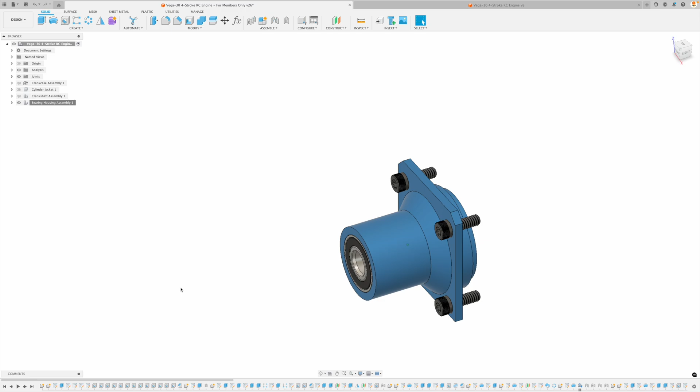Let's make the bearing housing assembly. So in this tutorial, we are going to tackle the bearing housing assembly. If I isolate this, you can see we have 4 screws, the bearing housing, and a front bearing and a rear bearing right there.

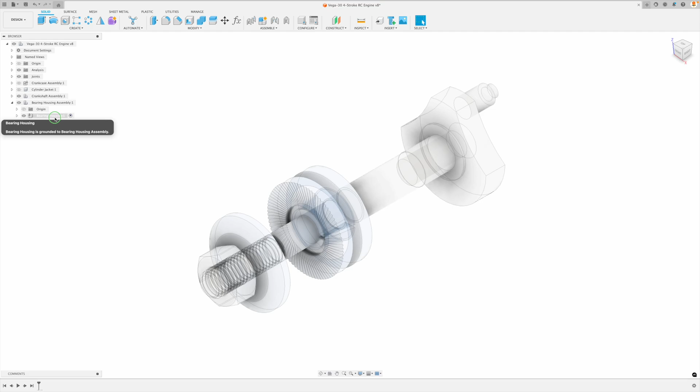So let's get started, and here's where we finished off with our last tutorial. Let's go right into it. We're going to start a new component, and of course this is going to become a sub-assembly, and we're going to call this our bearing housing assembly. Within our bearing housing assembly, I can just expand the browser there. We can create another new component, and this is going to be our bearing housing. Now from there, we can right click and we can isolate. And let's just get to sketching.

So the first thing we're going to do is create a sketch. Of course there's a number of different ways that we can do this, but this is just one approach. We are going to start off with the center rectangle, and I'm going to do the exact same thing here as our crankcase. So we're going to, first of all, constrain it vertically like this, and then we're just going to constrain it with dimensions as well. So the first one over here, 0.606. And to the top over here, we're going to go to 0.76 right there.

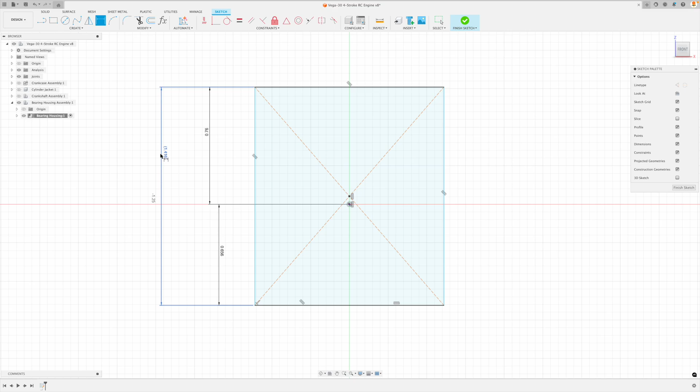Now I'm also going to create a reference over here, so let's create a driven dimension. This is going to be just the same as we see on our drawing, 1.416. And then down here, I'm going to do almost the same thing, 1.34. But I'd also like to create just a couple references as well as we see on our drawing: 0.67, create driven, and over here 0.67. Again, this is just to verify that what I have on the drawing and what I've just sketched is accurate.

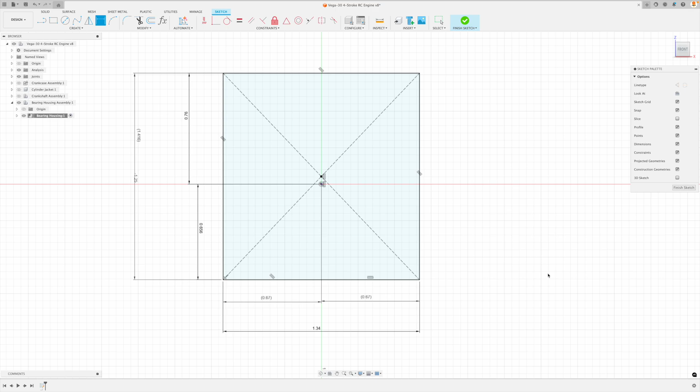And don't forget to print out this plan book, follow along with each drawing, and check off every dimension that you input. So we're going to start off with this primitive only, and then we're going to add all the fine features later. So let's extrude this - we can just start typing in our value right here, 0.094.

There we go. Now next, what we can do is we can create a sketch right on this face. We could also just right click and go create sketch. We've got our origin right in the center of our bore, so that was one reason why we created our center rectangle the way we did.

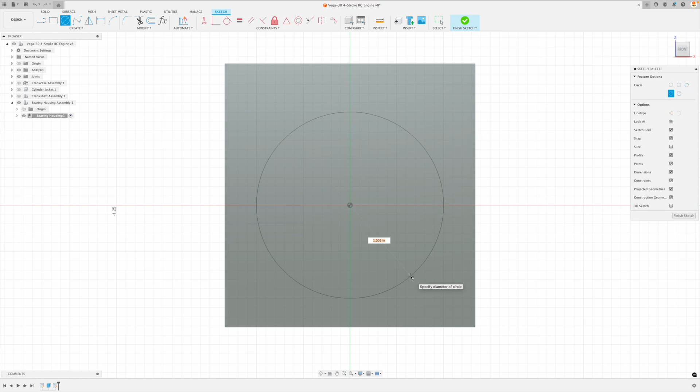And I'm going to create this a little bit different than our beginners tutorial, so if you've seen that, you'll see a different way that I've done it here. And this is quite easy - we're just going to put in our shaft dimension right there, and we can go right to extrude. We can pull this out and we're going to go right to our value 0.856.

Now there is actually a chamfer over here, and usually what I like to recommend is that we save our chamfers to the very end. So we're not going to put this in, but in reality, the manufacturing process of this bearing housing is - it's a lot easier on a lathe to put on a chamfer, so to speak, in where a fillet should be actually. The reason why they do this is because it's a whole lot easier to turn this on a lathe rather than putting in a big fillet. But we're hopefully going to machine this out on a CNC machine, and a fillet, in my opinion, looks a lot better, so we can make that whole feature a whole lot better later on.

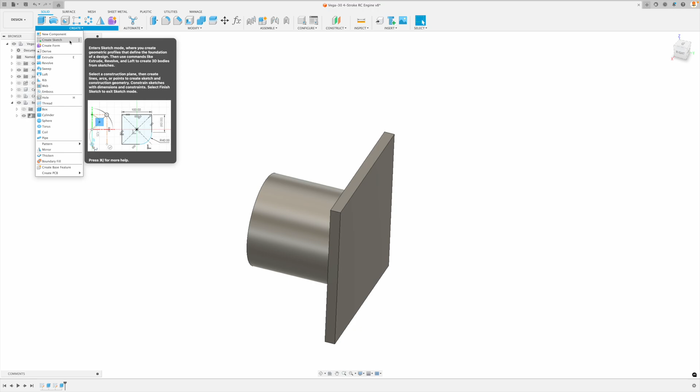So let's do all of our external cylinders first. I'm going to create another sketch on the other side over here, and we can just go right to town. There we go, and I'd like to position these off to the side, just like so. Finish that, and now let's extrude both of these here.

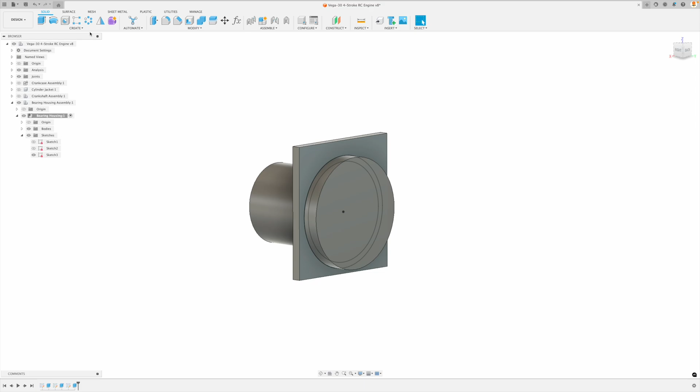0.17. And then we can go back to our sketch, make sure it's visible. And we can extrude by long clicking. We can pick that profile on the inside and we can extrude it. Now here, the start profile plane, we can actually pick an object. We can pick that face and then we can bring this on out, and this will be the actual dimension on our drawing. So 0.08, we can hide that sketch.

Now, as we've talked about before, getting into good organization habits, we can rename our sketches. There we go. Now let's put in all our bores as well. So we're going to take a look at this front long shaft side first.

And what I'd like to do is quickly add some parameters to this because I've actually already produced the beginner's tutorial. I know that these bearings are not easy to find. So I'd like to create some parameters so that we can easily and quickly adjust this if need be in the future to suit whatever bearing size we find and import.

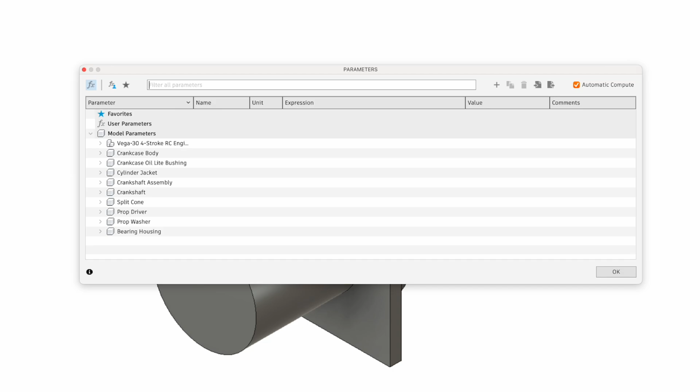So let's do this. I'm going to create our first parameter, which is going to be our bearing housing large bearing diameter and then depth. And I'll repeat that with the small bearing as well. And we can just type in 22 millimeters just like that. Let's expand this so we can see it a little bit better. And now we can put in the depth as well. And then we'll repeat this with the small bearing.

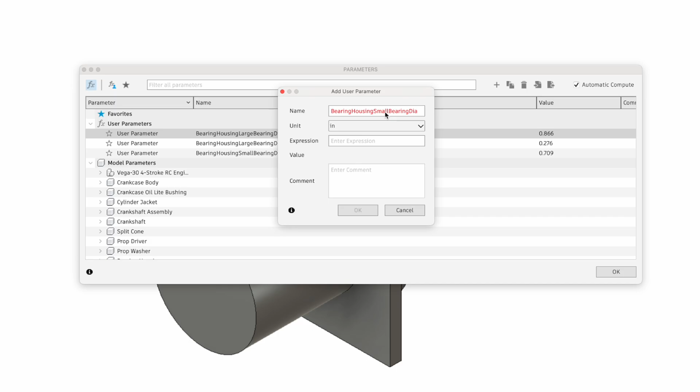Now we've got all these parameters. We can just easily apply them to our model right now. So let's do that. I'm going to create a sketch right on that face and then just create a point as well. And that can be our point of reference. Even though it should default to the origin, I find sometimes in Fusion it doesn't do that.

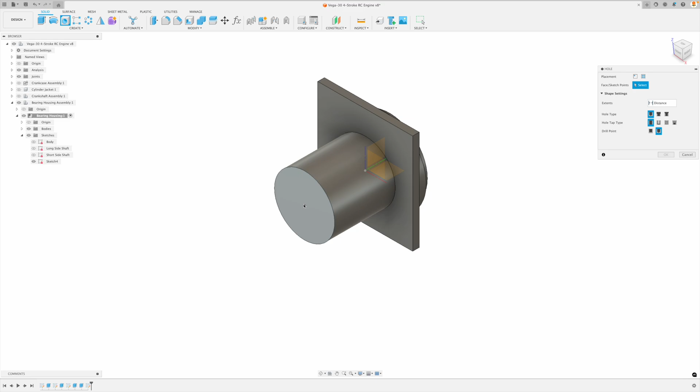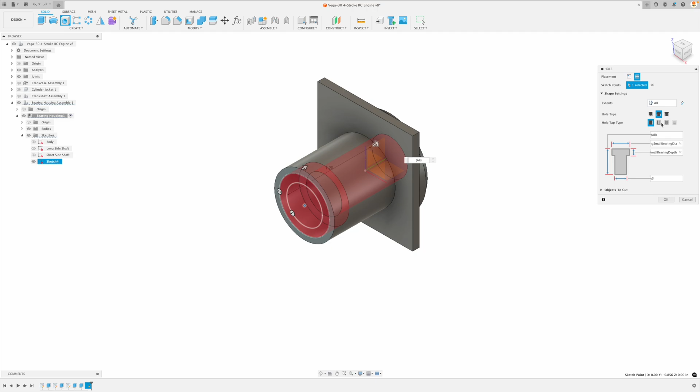So let's go to our hole command and we can change this to counterbore and change all of our parameters. Make sure to include our parameter right here. And this is going to be our small bearing diameter right there. And our depth is going to be right here. There we go. And we can change this to our right dimension, 0.5, and then go all the way through. There we go. So that will reference our first bearing,

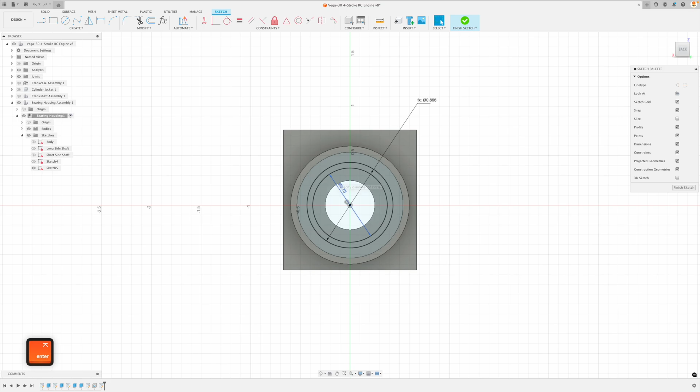and then we can do the same thing on the other side. Over here though, I'd like to create a sketch, and we can put in our diameters. That's going to be our first parameter right there. And then we can add the relief over here at 0.75. Great, finish sketch, and we can do the same thing as when we extruded this. We can set that into our proper depth, which this is actually going to be minus, and then our large bearing depth right there, 7 millimeters.

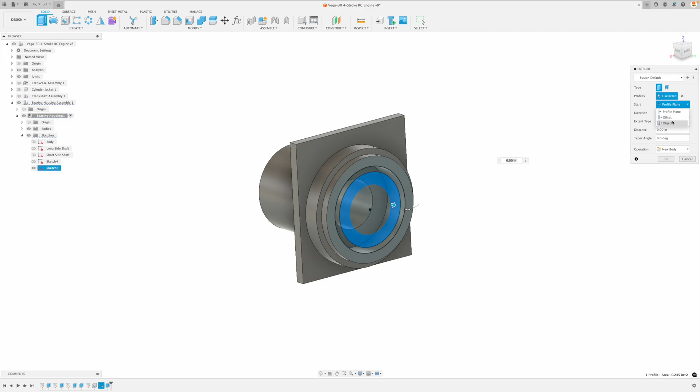Excellent. Let's make that sketch active, and we can extrude this. Not that profile, but this one. And we can do the same thing. Let's do an offset. Start right there and we'll go the opposite way, and this is going to be our 16 thou dimension right there. So we have a little bit of an offset. At this point, make sure to rename your sketches.

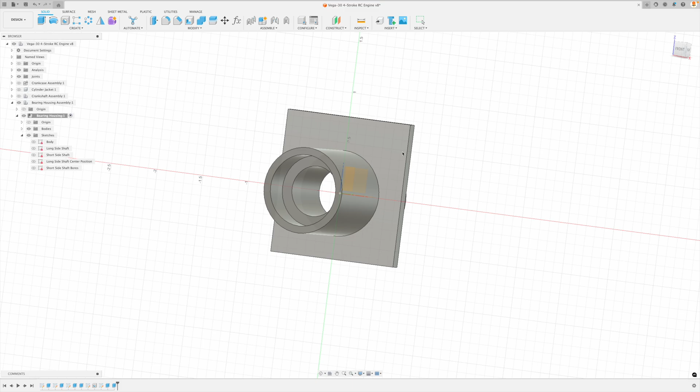Next, let's add the holes. And so I'm going to create a sketch right on that face right there. And again, our origin is set perfectly. We can go to center rectangle. I'm going to go and select the construction line type. There we go. And let's just put in our dimensions as we see, and this will reference the center points for our drilled holes very quickly and easily.

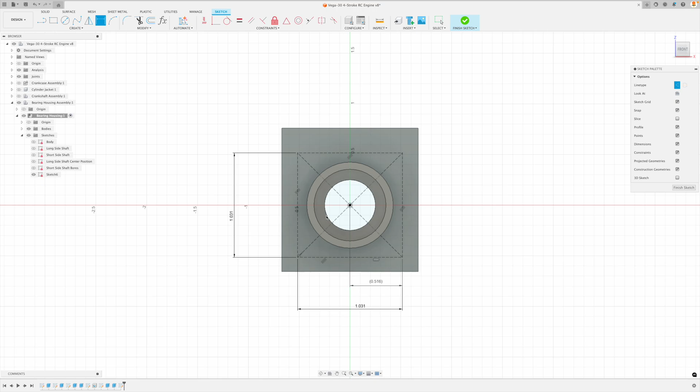So let's just do that, 1.031 there, and we'll do the same thing on the other side. We can also put in our reference dimensions right here as well. We can create driven, and as we see on our drawing, this is 0.516, but if we hover for a long time over it, it shows that it's actually indeed half of this value. But again, this is proving that our sketching is correct.

Let's finish our sketch there, and we can simply put in our holes at this point. So we'll go to the hole tool and we'll pick all 4 of these. Now there is an error right here.

If we go to clearance and pick the corresponding clearance size of the screw that we're going to use, you'll see that the dimension is slightly different. So I'm going to go on over here to unified screws. Go to the first one, it doesn't have a number 5 screw. So I have to go to the second set, and there is a number 5.

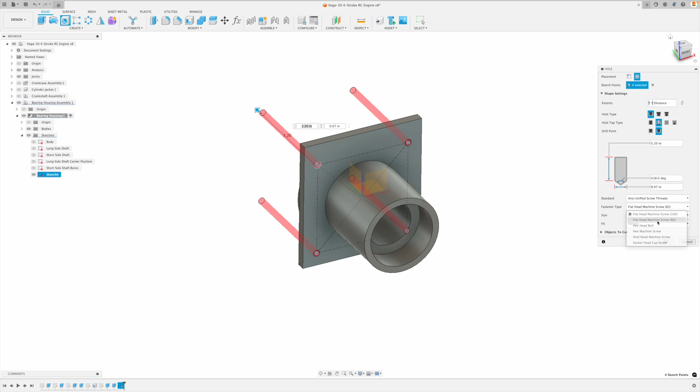We can go all the way through, and you can see that the diameter that it's finding here or selecting for us is 0.136. And on our drawing, it actually says 0.126. That is far too close to the diameter of our screw. And so I'd much rather go with this clearance diameter right here. I think on our drawing, it's probably just a mistake of the draftsman, or maybe they'd like it very tight, but regardless, I'm going to go with this method instead.

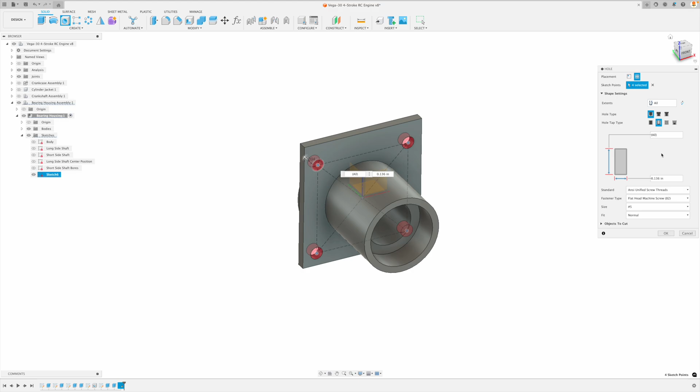At this point, we can add all our chamfers. So I can pick those 2 edges right there, and we're going to call this 0.11. Now I'm going to add a selection set, and I'm going to put one right here as well. And this value isn't actually on our drawing, so I'm just going to specify something, maybe 0.15. That looks about right. And then what I can also do is let's fillet those as well.

I can do something like, oh, that's way too big, maybe 25 thou, something like that, maybe 50 thou, make them a little bit bigger. And this will add a lot more strength. Remember, in manufacturing, the sharper the intersection points, well, the easier it is to break or shear at that point as well. So there we have it. This is looking great.

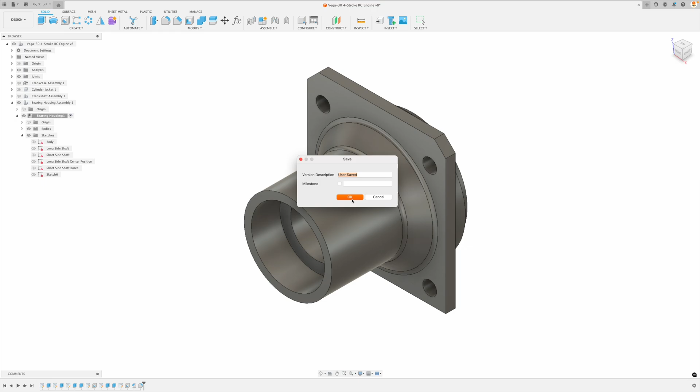I'm going to save this so that we don't lose our work. And let's rename the sketch as well. I can just put in our hole positions. Now our bearing housing is done. We can adjust all of the materials later on. So now what shall we do? Well, let's add our bearing.

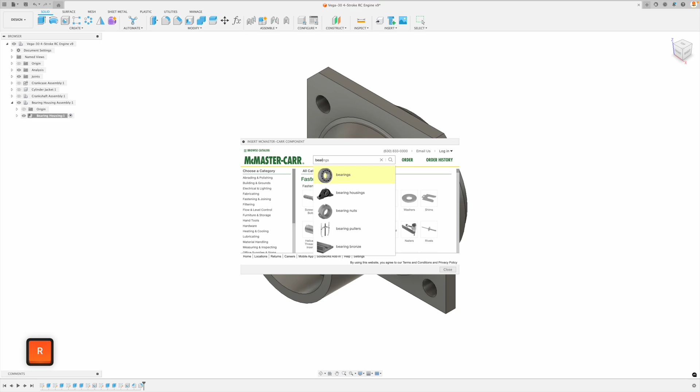So if we go to Insert, Insert McMaster-Carr Component, and we can just type in bearings. There we go. I'm going to make this a little bit bigger. Let's go to ball bearings. And we're going to go to permanently lubricated, and we're going to add bearing number 2 on the drawing. So on the ISO view, that is the bottom right bearing.

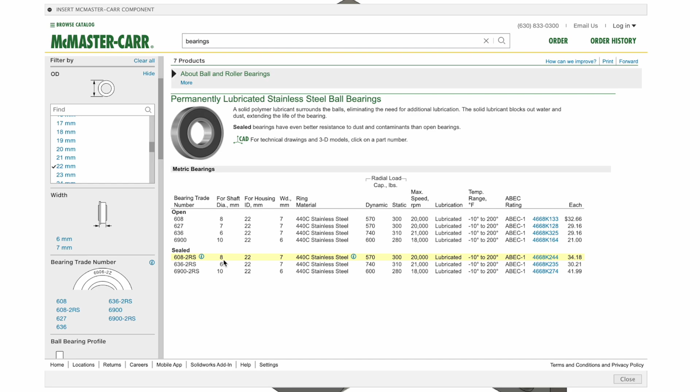And what we can do is we can search by OD. So let's find that, and this is a 22 millimeter OD. There we go. We'd like a sealed bearing, and the shaft diameter is going to be 8 millimeters, and the width is 7. So this is perfect. We're going to go right there. Make sure, actually, we haven't selected the right one. We have to select this one first.

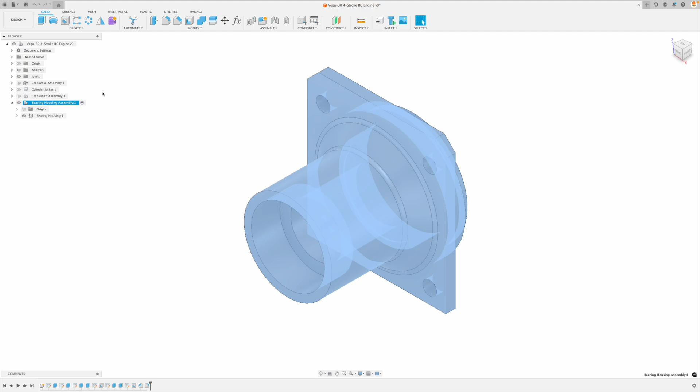Make sure we activate the sub-assembly, or otherwise, if we were to import a bearing, it would import it right into the bearing housing component right here and create a sub-assembly within that. So let's make sure that's active, Insert McMaster-Carr, do the same thing. And make sure we pick 2D or 3D STEP and go download. Very good, let's go OK, and then we can just drag this out right there.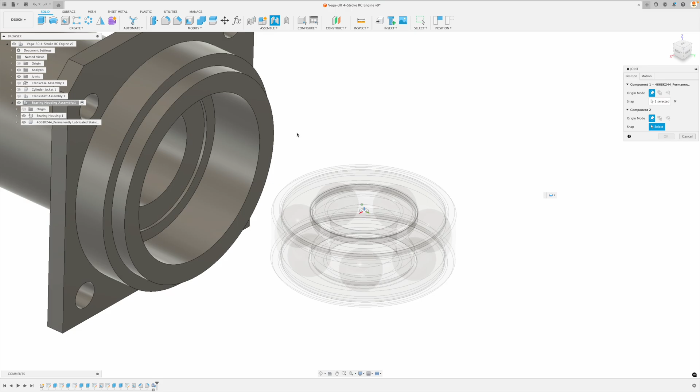Let's join it to this face, to the center position, and then grab that corresponding face right there, and this will line up perfectly with that face. So this is looking really, really good. So let's do the same thing with our other bearing over here. So if we go to Insert, Insert McMaster-Carr, do the exact same thing. Now here we're going to sort it by shaft diameter.

So if we go to 7 millimeters, you can see that we actually don't have an 18 millimeter bearing that we can select. We have a 19, 14, and 17. If we select 19, this might make the wall thickness too small or not beefy enough for our bearing to be press fit into that. It might make the material too weak. So instead of selecting 19 millimeter, I'm going to select 17, and let's import this. There we go. Let's go OK.

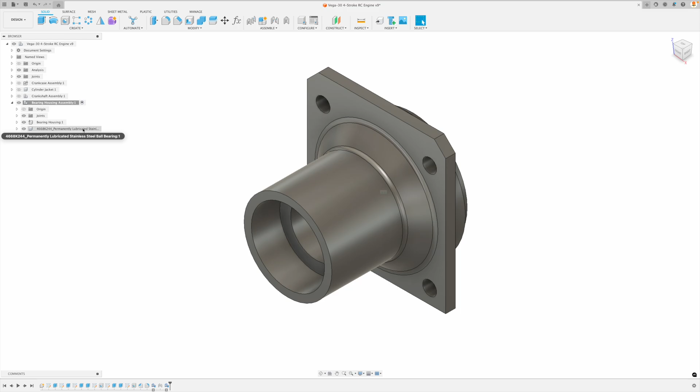And you can see because we've activated our subassembly right here, it's actually put these two bearings exactly where they need to be. Now here's a situation where our component is hidden by another component. We can just simply select that, and then we can drag it off to the side just like that. Let's do the same thing. We can pick that face and the center point, and pick this and the center point.

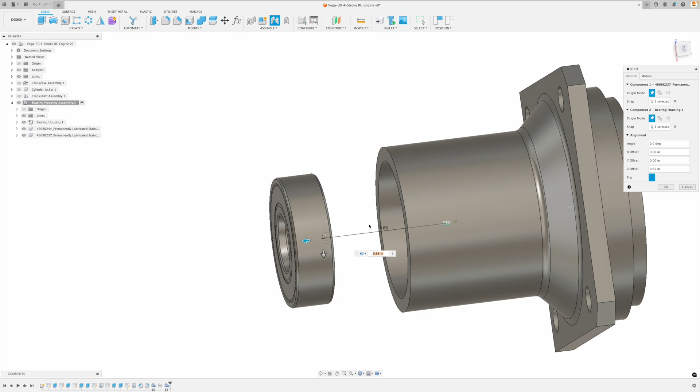And I think that's too far in, so we're going to go back right there. Let's go cancel, something weird is happening, so we can do it one more time. Pick those two and this face and the center point. And you can see now we've got a little bit of an issue. Maybe I made a mistake before, but let's go back to our parameters and we can simply change this now.

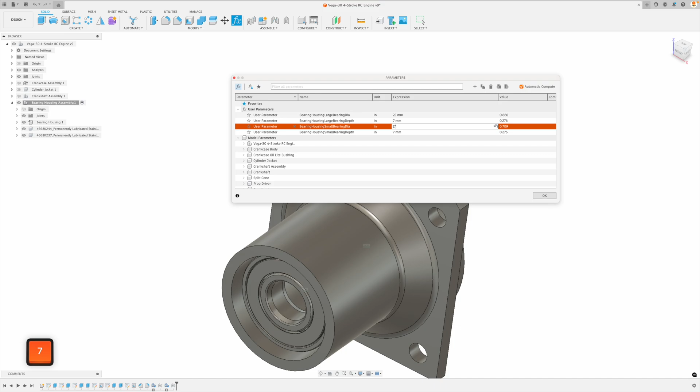So this is the small bearing diameter, and this is going to be 17 millimeters now. Perfect, that will be just like that. And apparently I have the wrong calculation. So 7 millimeters, if we're ever confused, we can just go right back to this part number, copy that, go Insert, Insert McMaster-Carr, search by that number, and it will bring it up right here. There we go. So this is actually only 5 millimeters deep.

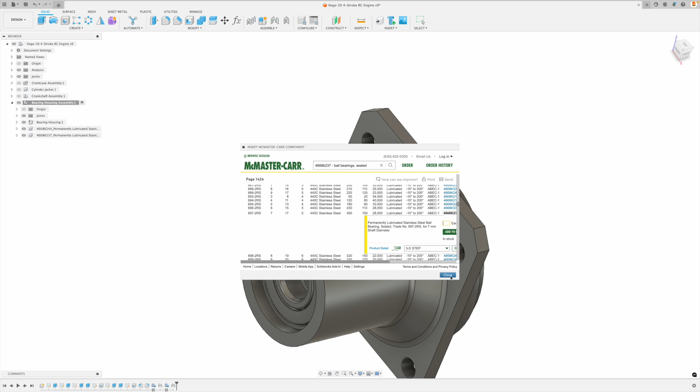So we can pick that. I guess I could have picked a better one, but this is fine. Let's just stick with this. We can go 5 millimeters. There we go, and that will position it properly right there. So I think everything is looking really good. Now all we need to do is insert our screws as well.

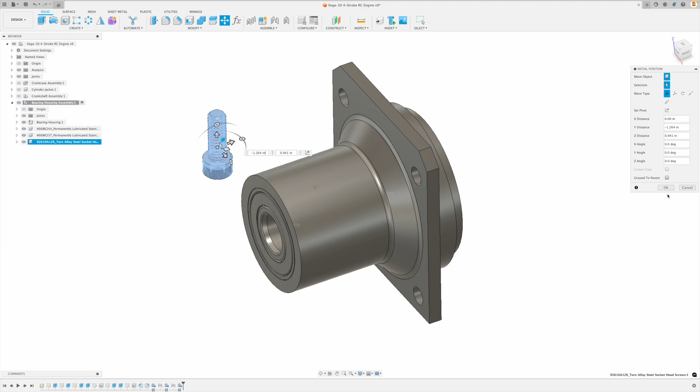So let's keep our bearing housing assembly activated, and we can go Insert, and let's go to McMaster-Carr Component again. We can go Screws and Bolts. I will expand this for everyone's sake. Socket head screws, and I would like to go down here and actually use Torx Plus. Very good. Make sure it's a 5-40, and we're going to go 3/8 inch depth. Let's pick this and download that. Perfect. We can just move this right on out of the way. Excellent. And now let's join it together.

I'm going to pick the face right there, and then I would like to position it what I would call quadrant 1. So if we're looking at the front face right now, I've taught this in many other tutorials that this would actually be quadrant 1 based off of our origin, and I would apply the other components or join them in the same order. So quadrant 2, quadrant 3, quadrant 4, and I'll show you in a moment why that actually makes sense and helps us. So now that we've got this screw right there, we can go to Duplicate with Joints, select our component, select our screw, and then we can just pick our other points of reference for our other screws. And we've got 1, 2, 3, 4, just like that.

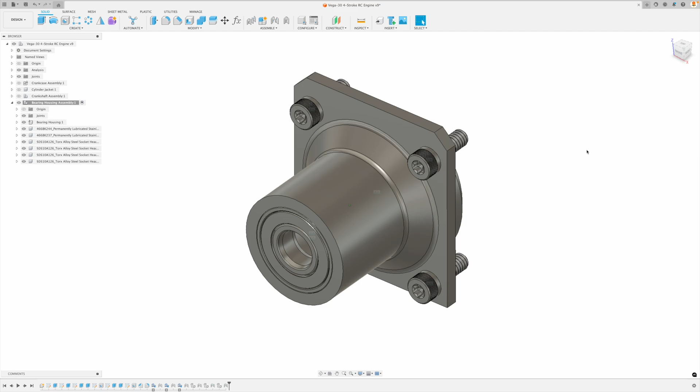This is looking great. So now let's just do a little housekeeping. We can go to joints over here, and I've forgotten what these joints are. So let's go edit and see what these actually refer to. So this is the bearing to the bearing housing. So I'm going to go over here to this one. I am going to copy that number and then go to our joint and say this to bearing housing. And then we can hide that.

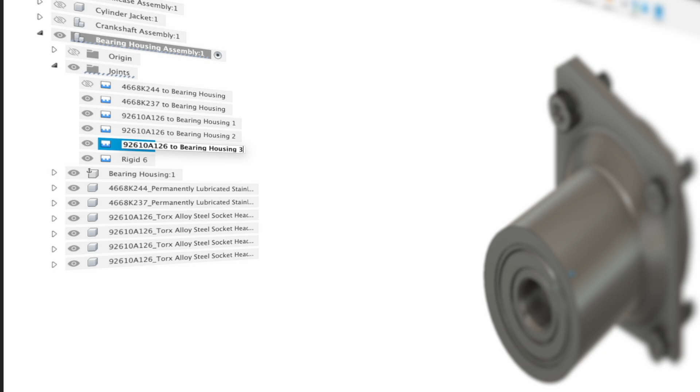I'll do the same thing to all the other components. And these I'm just going to rename 1, 2, 3, 4 respectively. And this corresponds to our quadrant location. So this just makes it very easy to find things and fix them in the future if we need. And now that we finish that, we can hide all those, hide our joints right there. And now let's apply our material.

So our bearing housing, we can right click, physical material, and this is 6061, drag and drop, perfect. Our screws here are already set to steel, but we can change the appearance. Let's press A for that. And then we can just go here to black, because these are black oxide screws. So I can drag and drop. You see, if I drag and drop to 1, it will actually change all of them. Perfect.

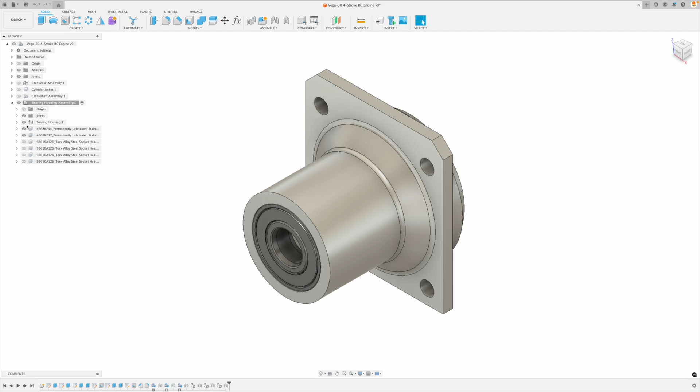Now let's go like this. Let's hide everything. Let's hide those screws and our bearing housing. And we've got our 2 bearings. And remember, these are stainless steel. So let's go over here. I'm going to pick both of those, right click, physical material, metal, and let's find stainless steel. I'm just going to go generic stainless steel over here. I'll drag and drop over here so that it applies to all the bodies. But of course, these seals are actually made of plastic. So let's go back and find the right kind of plastic. Now, I don't actually know what kind of plastic these are supposed to be.

So if there are any engineers out there and you know what kind of plastic the seals are supposed to be, let us know in the comments below.

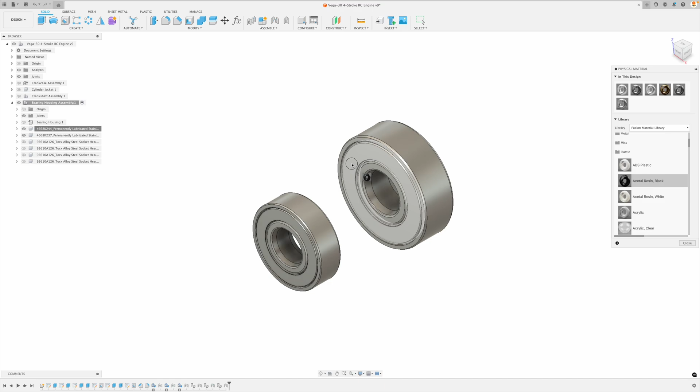But what I'm going to do is I can just drag and drop right on top of those and it will change them to the respective material. Let's make the rest visible. And I'm also going to change the appearance of this to our blue anodized rough color. That is looking really good.

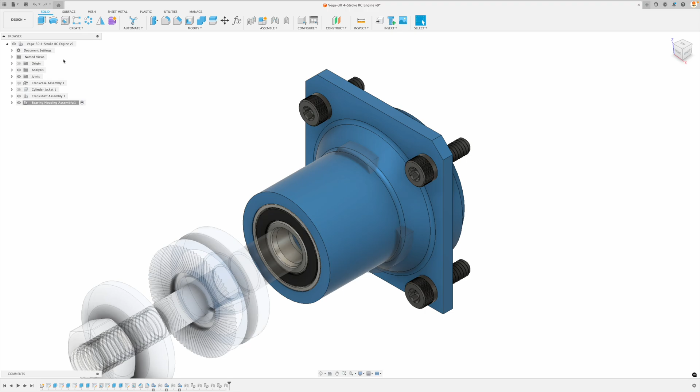So now what do we need to do? Well, let's make the crankshaft assembly visible. And we can go to our top level component over here so that both of them we can work with. And let's join the shaft to our bearing housing. So let's do that. We're going to join, first of all, this point of reference. It's the center of that face. And we will connect it to our bearing right there.

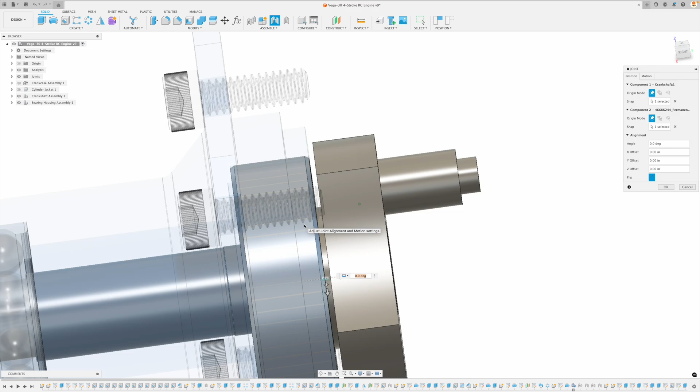This is looking great. You can see what faces are actually connected with each other. We can check this one out too. You can see that this shaft is extended just a little bit past our bearing housing, which means that anything that's connected to here, like the prop driver and split ring, will not interfere with our bearing or this face. So that is looking perfect.

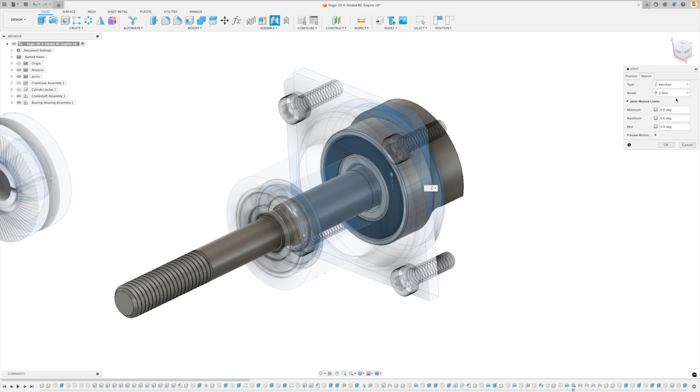Now, the one thing that we're going to change is our motion. Let's go there and make it revolute. And this will give us a preview of what's happening here. That looks great.

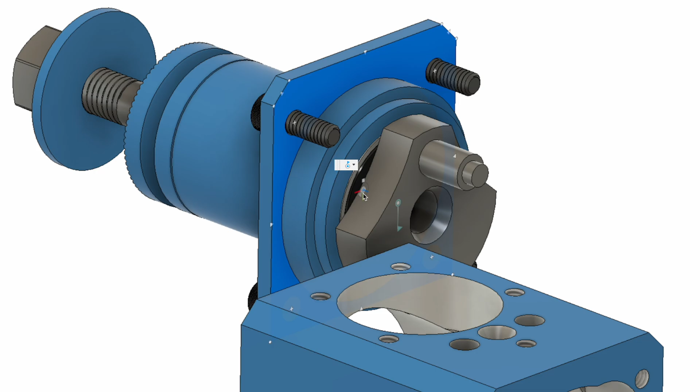Now that that is assembled, we can make the crankcase assembly visible. And we are going to join the center of this. And I would like to pick this face right here. And instead of picking the center of the face, I'm going to pick the center of the bore, which is this little plus sign right there. Again, the square is the center of the entire face. And this is the center of the bore.

So let's pick that. And then the corresponding one on this face. Again, we can pick that. And this, we don't want it to be revolute. We want to make that rigid. And let's go OK. And now we've got everything set up.

So let's go back to joints and make sure we do some housekeeping here. So this we're going to call our crankshaft assembly to our bearing housing assembly. And then rigid 3 is going to be our bearing housing assembly to our crankcase. Perfect. Let's hide those both right there.

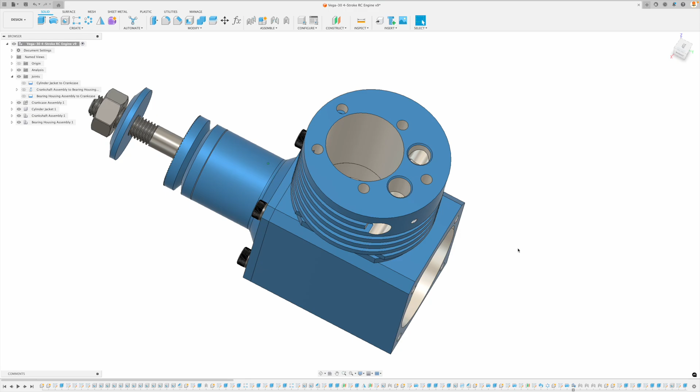We can make the cylinder jacket visible. And now this kind of gives us an indication of what we are working with. So you see this pin right here? The con rod is going to be connected to that. The follower shaft is going to be connected to this, to all the cams over here, which will drive the poppets up here and make our engine work.

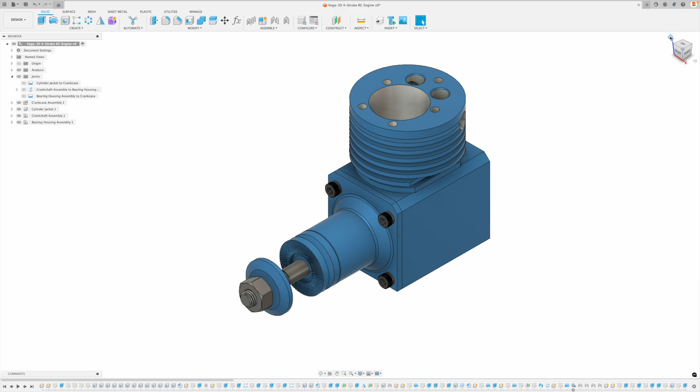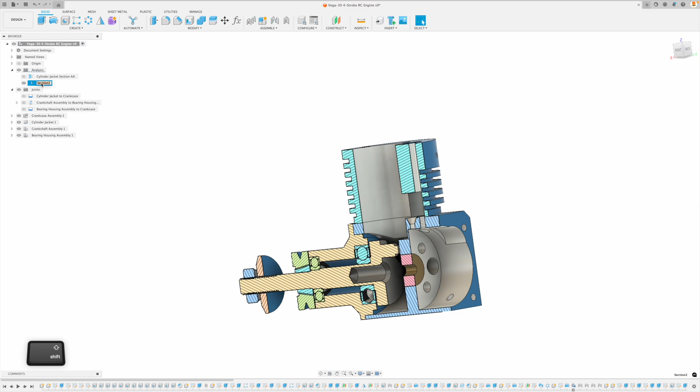So this is looking great. Again, at this point, what we could do is go back to our analysis. This has a section AA. We're going to add another analysis right now. So let's go there to inspect and go section analysis. And let's just pick this YZ plane. So let's pick that and go all the way through. And we can even call this analysis our section YZ plane.

Very good. And now we can grab that pin and we can add some motion. You can see that everything is updating as we change this motion. So if you're at this point, that looks great. Let's just hide that analysis right now and we can go back to our home position.

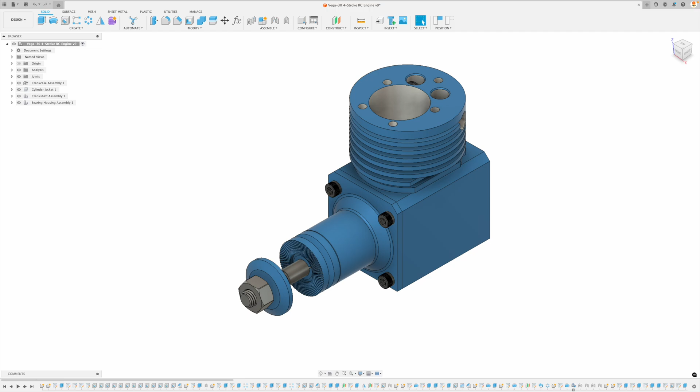Let's minimize everything. So we hope that you've benefited from this tutorial. Looking forward to seeing you at the next one where we're going to discuss the back plate. We've got some oilite bushings. We've got some stock bearings as well that we're going to add. And maybe we'll even get to the piston and liner.